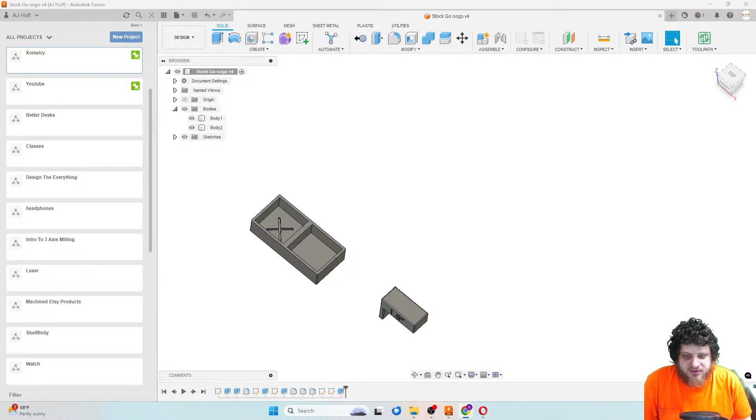So with the new end mill, it sounds good out there. I think that increased my cycle time by a minute or 2. I guess it was 15 minutes, so 16 minutes now. Anyway, so we're going to do some Fusion stuff today. We'll see how much we get through.

Plan A was to do my Fusion tool libraries to neatify them and modernize them a little bit. But I also have a modeling project that you guys might actually be interested in. And I want to start with the modeling project because I want to 3D print it as soon as I can, and we can do some prototyping right here on stream. And then we can switch back and forth between the tool libraries and the modeling stuff. So this model that's up right here, you guys might actually be interested in this.

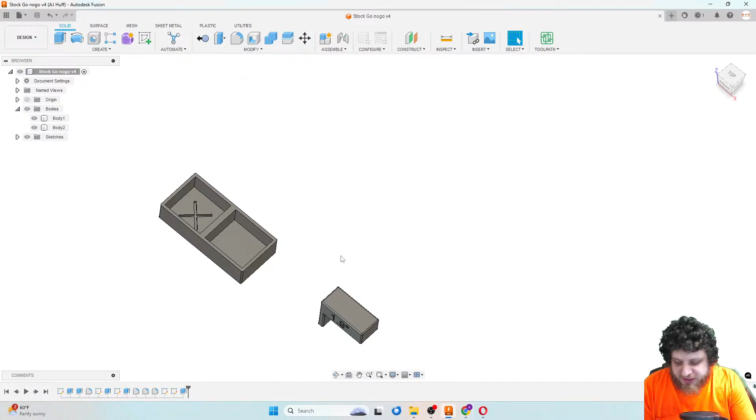This is what I'm using when I'm cutting material. So I made this little hooky thing here, and this is for setting the length of the material when I use my saw. So basically, I just hook the material right here on this end, and then I push this big flat end up against the blade of my saw, and then it's good to cut. And that gives me the length of stock that I'm using for this big job.

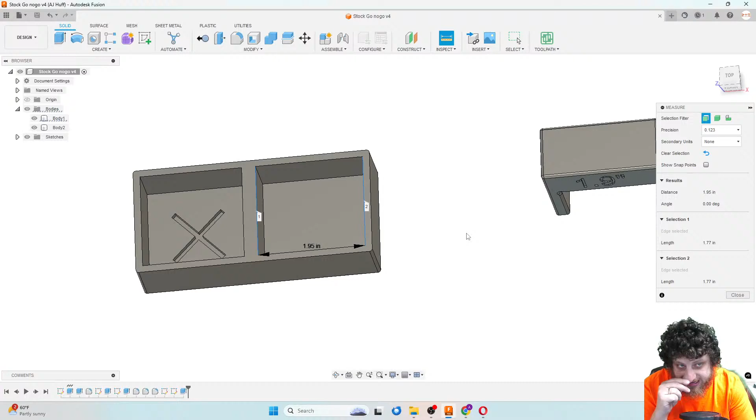And then once the stock falls off of the saw, I have this little bin here. And if we look at the length here, so this is 1.85. This is 1.95. And of course, our cut length is 1.9. So this gives us a go, no-go gauge for the material coming off the saw.

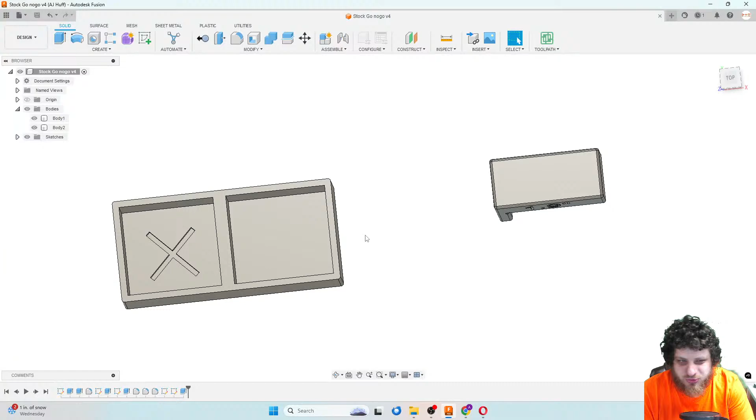So I can very quickly set it with this 1.9 inch measuring device. And then I can make sure that the actual cut went well by sticking it in here. Because if it's too big, I might break an end mill. If it's too small, I'll scrap a part and just be wasting machine time. So in that same vein, today we are going to design a go, no-go gauge pin holder. That's easy to say. Let me show you.

So on this big production job, there are a few parts that I need to check with gauge pins. And I don't really care what the actual dimension is. I just care that it's in spec. And so what I have done is I have taped a go gauge pin and a no-go gauge pin together. So like I think this one is 0.122 and this one is 0.124.

And if the hole is in that range, as long as the go goes and the no-go doesn't, then the part is in spec. This one is for, I believe, actually a slot, and it's the same deal. One side is the bottom of the range, one side is the top of the range, and I even have a really big one here.

So I check those. I check at least one part every single time with those gauge pins, and then there are a couple dimensions that I just caliper. And between those, I basically hit all of the tools. And if you check at least one dimension for all of the tools and the process is already proven, then you can be pretty confident that you're making good parts.

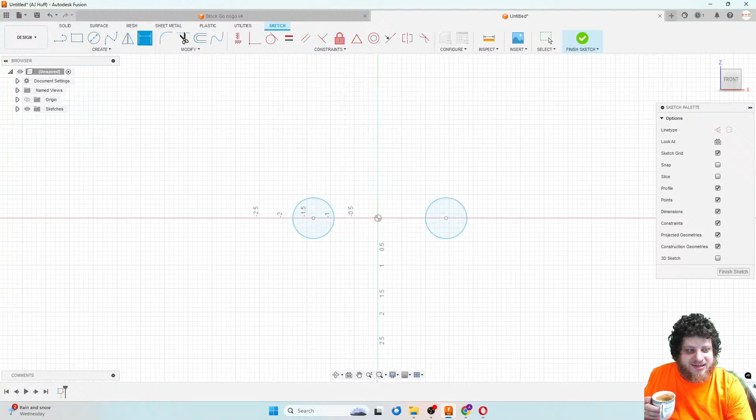So I'm going to call this go. So go hole equals, and I'll start with 0.125. And then I'm just going to come over here and type no go hole equals, I don't know, 0.13. These could be any dimensions. And we'll dimension this here. I think I'm just going to leave this as a fixed dimension. Maybe I'll make it parametric. How do we want to do this? We'll do it this way.

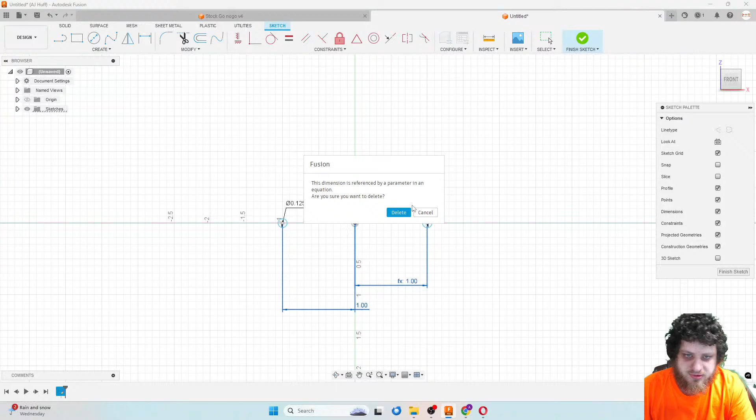I'll draw a line between the two circles and then put a point at the midpoint of the line and then coincident that to the origin. So now this will always stay centered no matter how long that line is. And I'm going to make a new dimension here. We'll call this center distance equals 2. Okay. So now those pins will always be 2 inches away, which should be way more than enough for basically any reasonable size gauge pin.

Maybe we could even go to 1. Because if you had 2 half-inch pins, then they would be half an inch away from each other. So I think that's fine.

Yes, James, I did see your PM. I did not read it, but I saw that it was there. I will take a look at that later. Like I said, I've kind of been running in circles all day. Hi, JB. Perfect time for it. It's 7:30 over there, and you're doing kind of the same. Sounds good. Wait, JB Customs, are you the same as JB Pipes and Muffler? I always assumed you were the same account, and I was confused as to why you had two memberships.

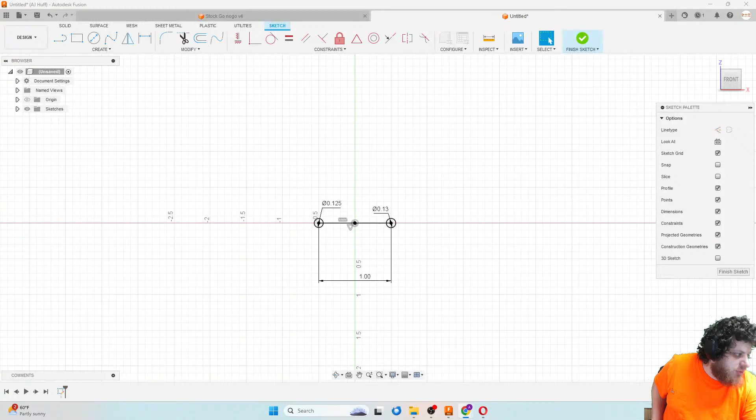I'm sorry, I still don't know how to say your name, but Oishishikana. We're doing this on OBS right now, but yes, I don't have it set up with the wireless cameras. Or well, I guess they even could be wired, but I don't have it set up out there by the machine.

What is my two-factor code? I rate that one a 1 out of 10. Okay, we're logging into Wyze. I think I can probably show you this again. Is there a way I can see my cameras? No, I don't want to buy a camera. I'm starting to think we can't do this, guys. I don't think this is going to work. Wyze view camera online. Wyze web view. That's not what I meant.

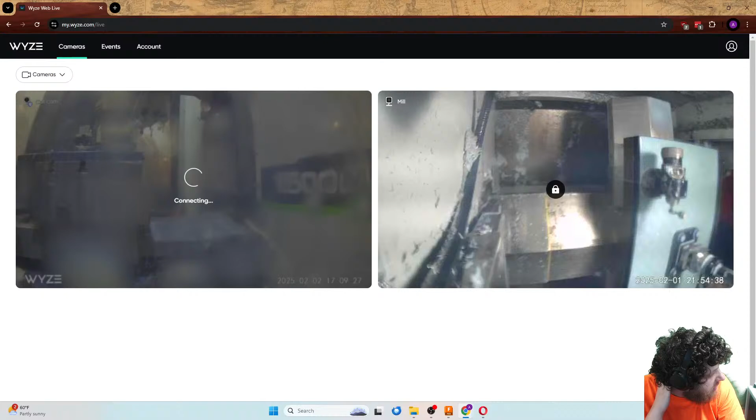Aha! This might actually work. Oh! I didn't know you could plug Wyze in. The camera's aiming the wrong way. Hey, look, you can see the Haas too. You can see the mountains of chips built up. All right, I'm gonna leave this here, and I will be right back.

Oisha can kind of, if you can tell me how to pronounce your name, that would be great. And also, if you can give me the words to Google, I'll get that figured out. Yeah, the cat cam is no longer being used for a cat. But one second, let me go change parts. I'll be back. I'll re-aim my camera.

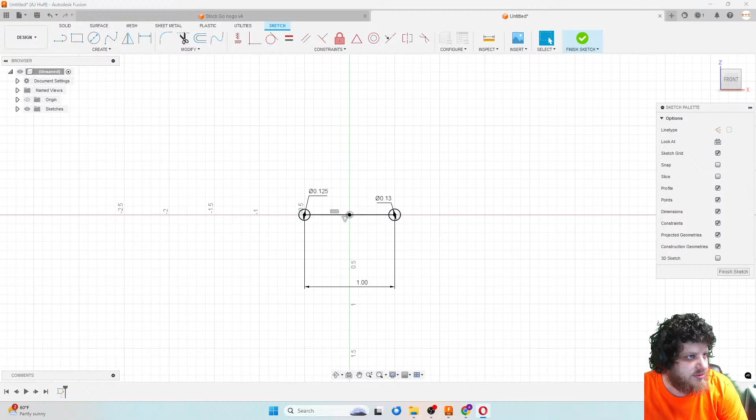We'll get this, guys. Oh no, I've closed all my windows. Where are you guys? There you are. A browser source for OBS. Cool. Why does LastPass not? Oh no. I know what's going on. This is fine. Where did Fusion go? Come back, Fusion. This wouldn't be a stream if there weren't some technical difficulties.

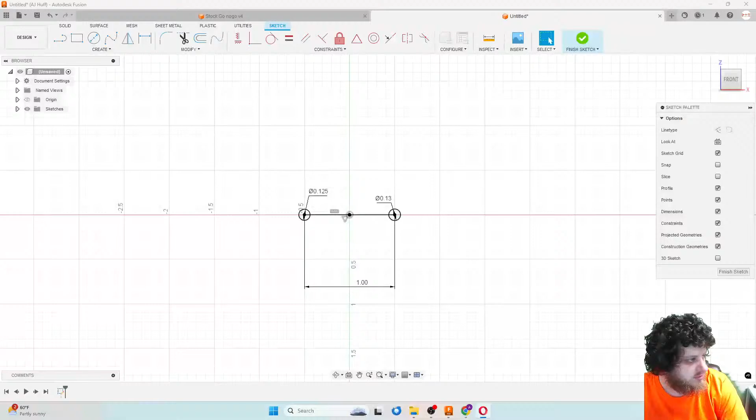Nope, we gotta do two-factor authentication again. Hold on. Add the URL as a browser source. Fine. Where's my OBS setup? You guys can infinity mirror. Sources. I've never done a browser source. Browser. I've lost that. Apparently, I closed the Wyze webcam. This got derailed really fast, which is probably not great considering I'm time crunched.

All right, create new, Wyze. Okay. Why did you not copy that? Control C, Control V. Okay. Oh my gosh, that did. Yeah, sure. How do I log in now? Oh, hold on, I lost chat. Let me pull the chat back up. How do we interact? All right. Now I bet we get to two-factor authentication again.

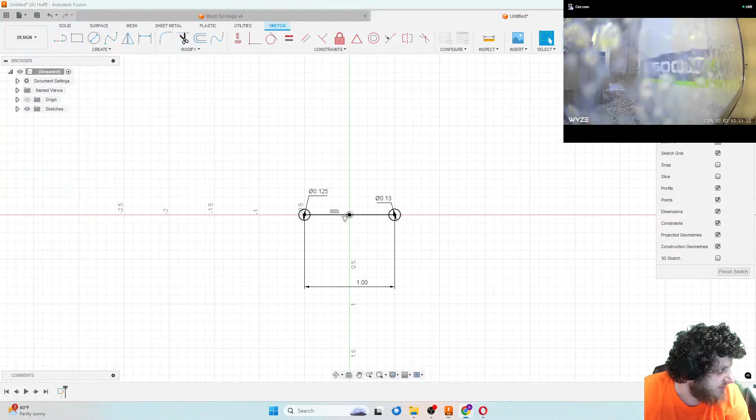Are you guys getting the audio from that? Is the audio coming through? Because you probably don't want the audio. It also sounds super tinny. I don't know how you're getting the audio, actually. You must just be hearing it through my mic, maybe? Oh, it's coming out of my own computer. Probably because I had it up. Okay. I think we're good now. I think that's as good as we're going to get.

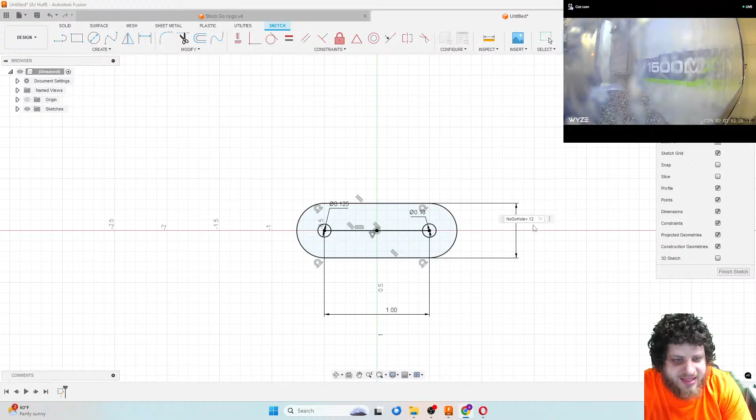So, all right, we're parametric modeling these. If I open up the parameters menu, we have our go hole, no go hole, and center distance. I think I'm just going to connect them with an obround. And will the no-go always be bigger than the go? I think it will be. So I can do no-go. Oh. This can be no-go hole plus... sorry. That can be no-go hole plus an eighth, maybe? Does that make sense?

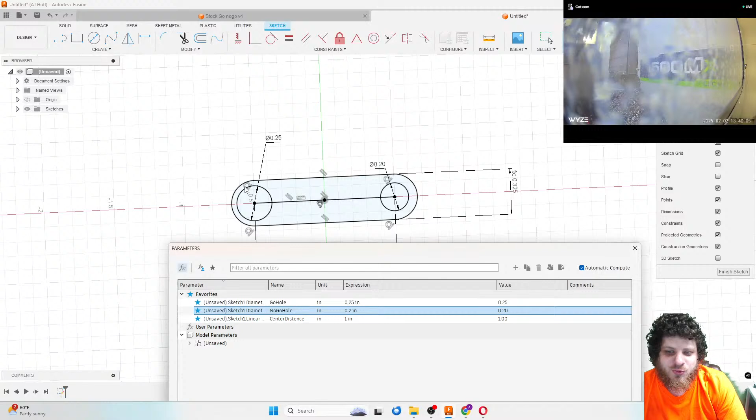That should be... Yeah, okay, let's try some combinations. So let's say you have a 0.45 go and a 0.46 no-go. Yeah, that still works. Now, okay, so this is kind of the parametric base of my little holder here. What if we tried 0.25 with the 0.46? Yeah, that seems to work. The only thing where we could have issues is if the no-go is smaller. It's working for now, but eventually this could end up smaller than the hole. So let's just set the no-go back to 255. There we go.

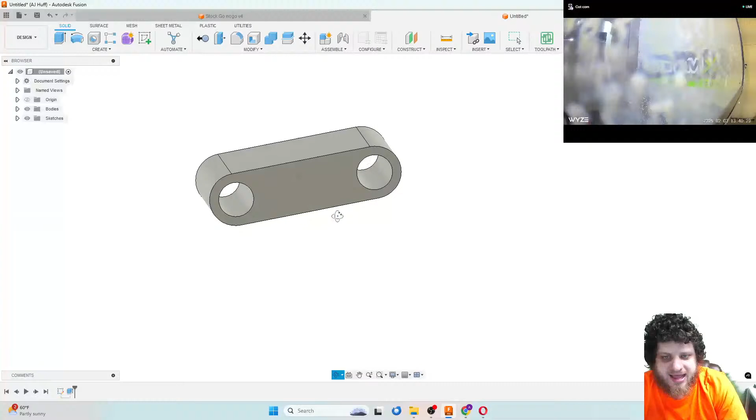And now we can extrude this out. This could just be thickness. I don't think that needs to be a specific number. Maybe 0.75 inches. Like, we don't need to make that tied to the pins. So this will be kind of the foundation, but I want a way to kind of secure the pins in there. And I've been thinking about how to do that. And I think the way is just to make it a tight fit and then kind of have some spring loadedness on this. 0.4 millimeters maybe. And we'll get those lined up.

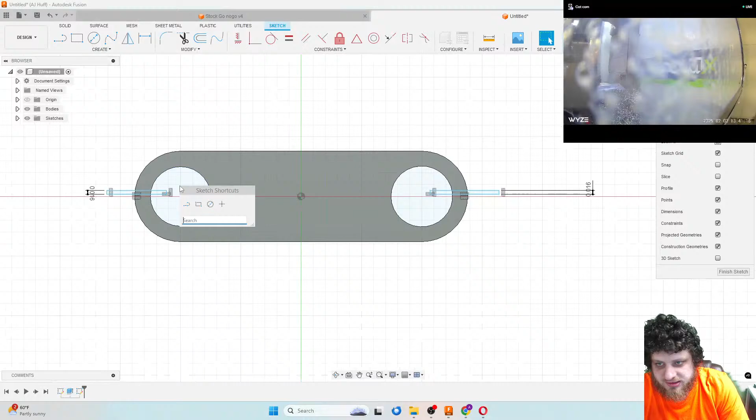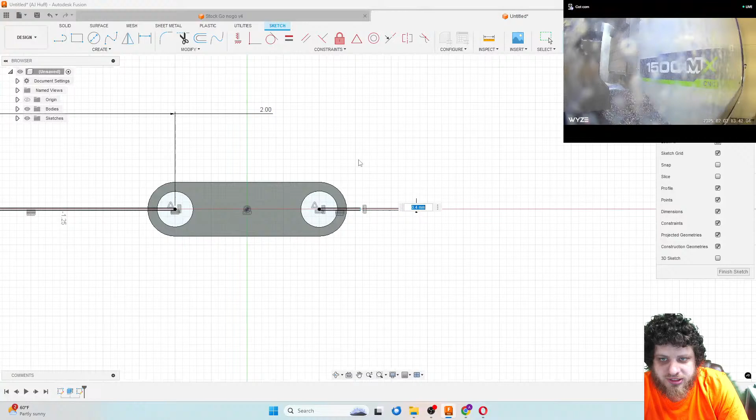And I'm going to put a center point on each of the sides here. And make those horizontal with the origin. That's funny. They line themselves up. Actually, I could have just done this. I'm just going to coincidence them to the center of that hole. Okay, there we go. And this doesn't really need to be anything specific. It just needs to be long. So I guess we could do it off the diameter. So no-go hole, I don't know, times 2. No, actually, that could cause issues. Let's just make it like 2 inches. The sketch will look ugly, but you'll never have a 2-inch pin in here.

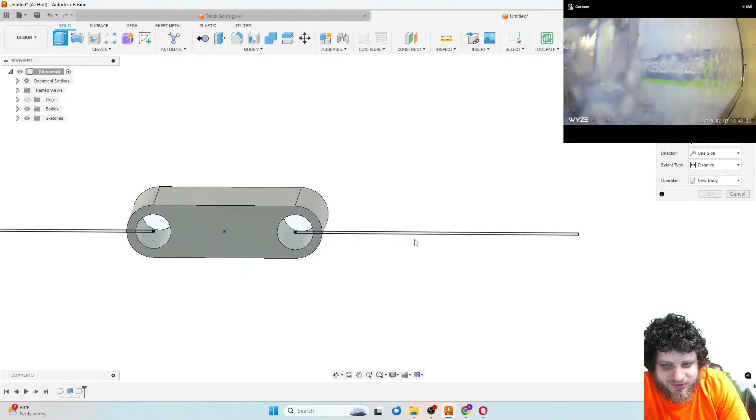And I guess I should have made this parametric. So let's call this slot width equals 0.4 millimeters. I'm doing 0.4 millimeters because that's the nozzle width on most 3D printers. I don't think it matters here because I'm in negative space, but that was my logic behind it. It's probably actually too small. And we'll extrude this as a cut, symmetric, through all. Okay. So that just cut everything no matter what. And then, to make sure that your pins don't fall out, I was going to have a place where you could wrap a zip tie around this. And now I need to figure out how to model that.

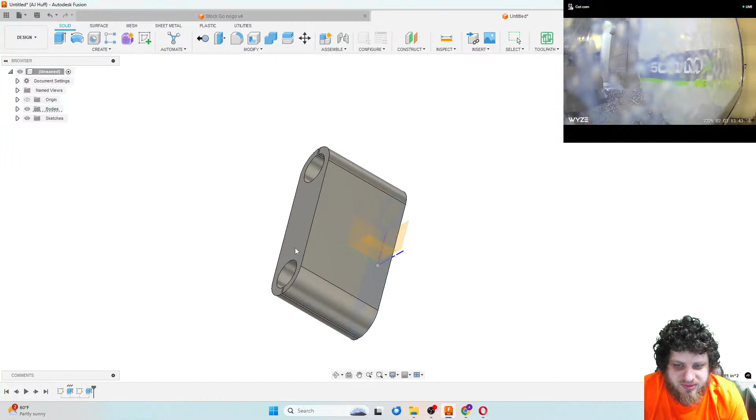We could put a plane in the middle. Oop. Come on. Put a plane in the middle. Put a sketch on that. Slice, project in our outside. And offset this maybe. How much? How thick is a zip tie? How big is a zip tie? Where's the zip tie? I don't have any zip ties on hand.

I don't know, 0.2. I guess it doesn't actually have to fit the whole zip tie. I don't like doing it this way. It doesn't actually need to fit the whole zip tie. It just needs to kind of keep it from sliding around. We'll do this as a... oop, that was the wrong kind of slot. We'll do this as a slot, center to center. And I'll just put a dimension here. Zip depth equals 0.2. No, not 0.2, 0.02.

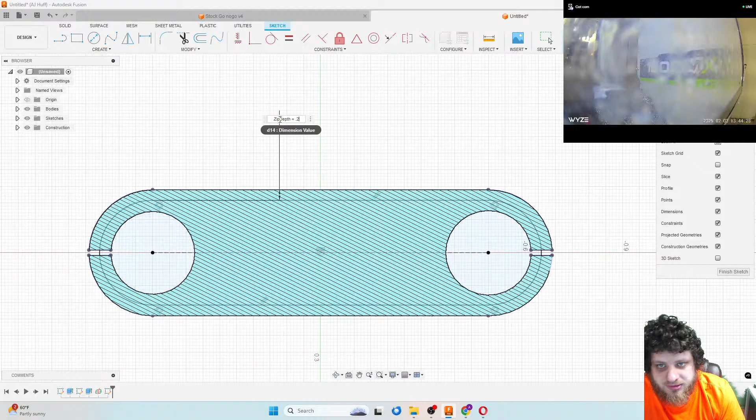Okay, so that should give us that, which I can now go ahead and do one more of those slots. And this time I'm just going to line it up with the outside. "Instead of wrapping the zip tie all the way around, drill 2 holes and put a zip tie on each side." It's not a bad idea. Let's do a test, Austin, on this one.

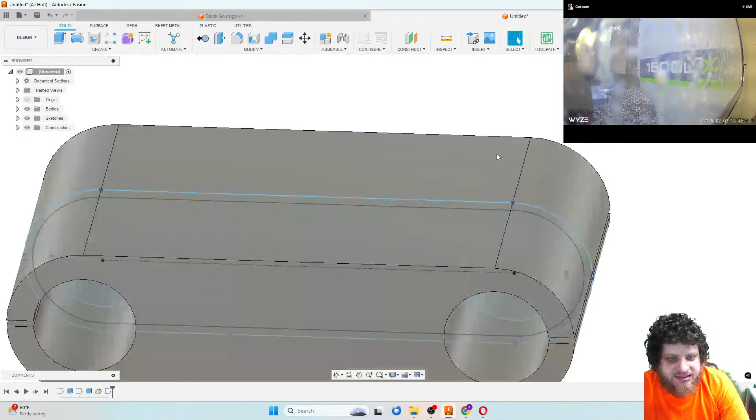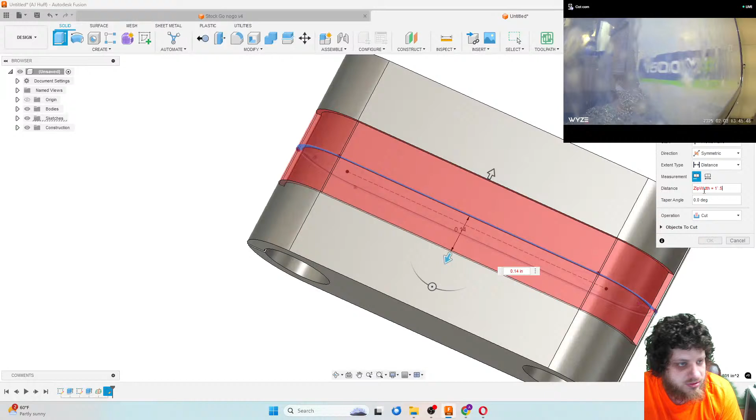The reason I'm hesitant to drill a hole is only because I don't want this to be determined. Like I want any zip tie to be able to work on it. And so I'm going to leave like a really, really big room here. But you are right, that would hold a lot better. Yeah, that should be more than enough. But yeah, you're not wrong. All right. Nope. I'm struggling with typing here. 0.15. Because if the zip tie is 1/8 of an inch, that should be fine.

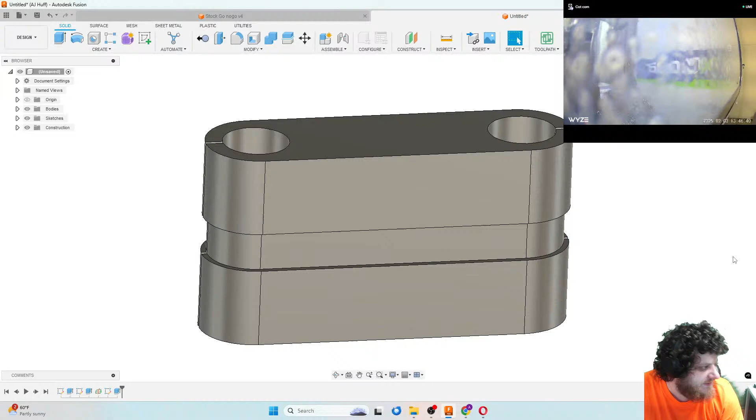"If I drill 2 holes, it'll compress. If I wrap it all the way around, it'll oblong the hole." Well, that's kind of the point. Because I want it to grab the gauge pins. So I don't really care if it's like compressing it as a circle or if it's just moving these sides in. That's fine with me. Jacob, yes, we're going to 3D print these. So the theory, if this works out, it will pull the outside. You're not wrong. I absolutely agree with you.

What if we do both? Because like I do, like, not that button. You're not wrong. I guess I'm just lazy is the answer. But how are we going to do this one? Let's try. We could do one big hole in the middle. Let's just try this first. This will 3D print in like 12 minutes.

But the idea here, guys, if this wasn't clear, and I'm sure I'll share this model. I'll just call this YouTube gauge pin holder. I'll share this model, but the idea is you can just open up the parameter menu, type in a size for a go pin and a no go pin, and then it'll just spit out whatever gauge pin holder you need. I am going to turn off some of these as favorites. They'll be there, but not as visible. All right, let's do a test print.

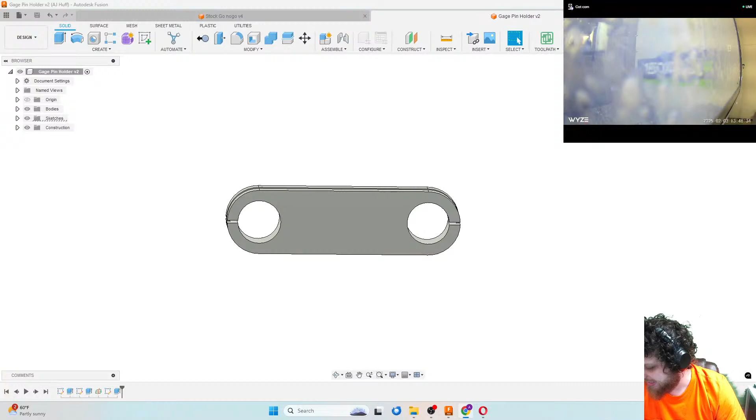Theo, we are making a parametric holder for gauge pins so that you can set up a go and a no-go pair instead of taping them together like I've done here. So we're trying to replace this janky setup with a real holder. The other thing was, do we want to emboss anything on here for go, no go? Yeah, I guess we do. Though that does mean I have to remember which side was go. So this side was go. Let's just make go really small. Now we can visually see a difference.

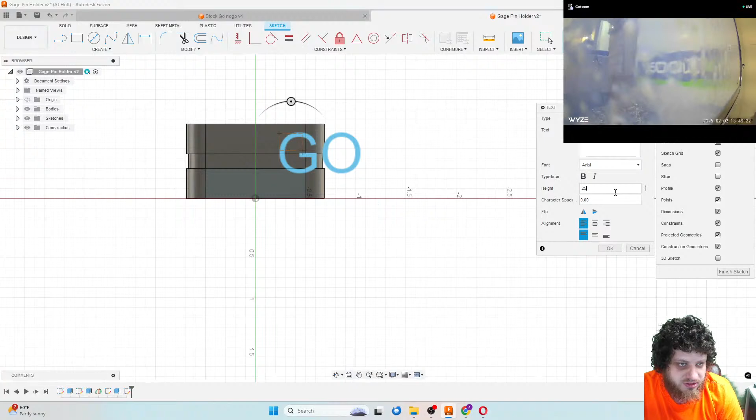So I think if I just do text is probably the easiest way. So go. We can make that smaller. How are we going to place this text, though? Maybe I just don't worry about that too much. Is it possible to do parametric text? I don't think they have added that yet. You have to use an extension. We can, at very least, constrain the text itself. I'm trying to remember if there were any tricks. Yeah, we center it, I believe, and you give it dimensions.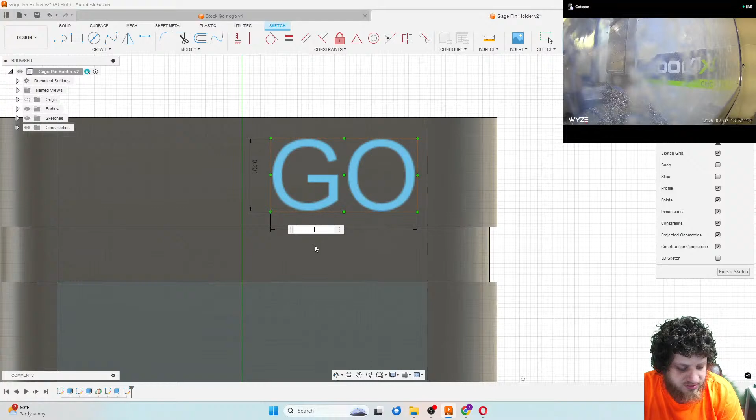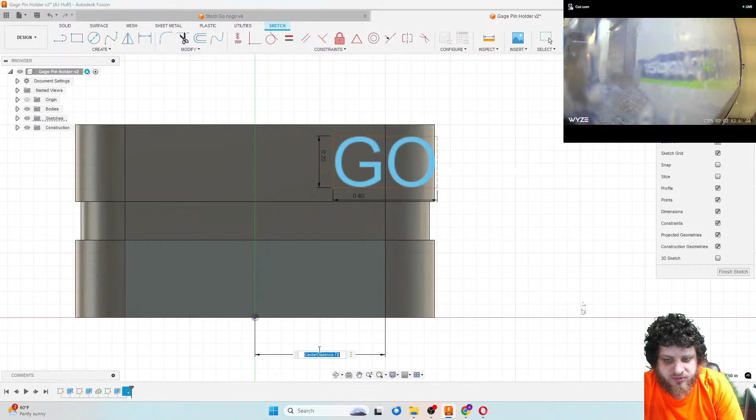And we can do a dimension from here to there. And what did we call the length? Width? Center. Spacing? I have no idea what I called that dimension. And of course I hid it down here now. Maybe I should not have hidden those dimensions or unfavorited them. Center distance. Okay, let's bring that back as a favorite. Slot width. I regret doing that. Okay, so center distance divided by 2. Almost. Divided by 4. Sure. And I think we want to turn it around.

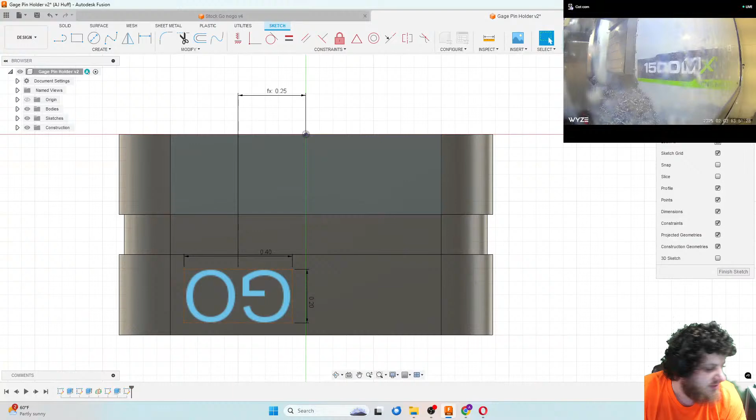JB, I'm going to set this up so that it can be done with 2-color printing. Oh, my machine's done. I can't actually do 2-color printing, but I do want to make this model so that it's useful to other people. Is doing these upside down of each other a bad idea? It seems like it should be fine. I'm just going to call this one no. Go and no. Or is that too close where they could get mixed up? First prototype. We can tune it later. All right, I'm going to go change parts. I'll try to re-aim the camera better this time.

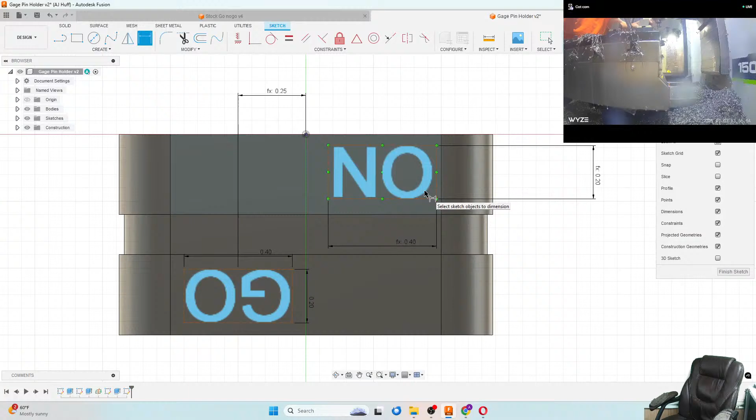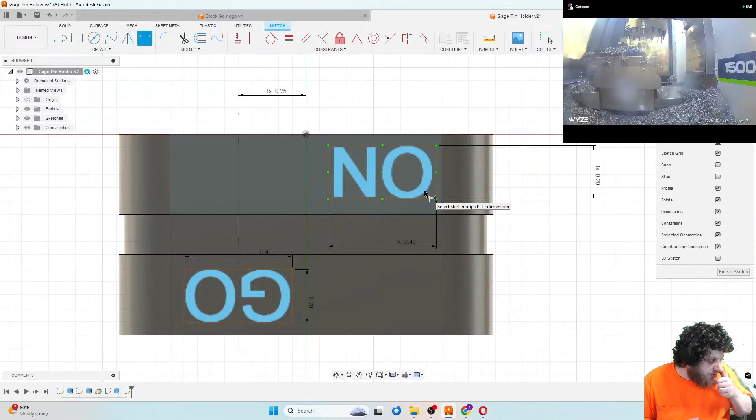Okay, we're back. Dual color printing gets weird sometimes on small text. Also, painting in Prusa Slicer also works, the modeling separates. Freaky Climber, you think I should do no-go? What if I just did a big X? But yeah, I don't have a lot of experience with dual color printing. I figured that my next printer might have that though. So that's where my logic of doing it as dual color came from.

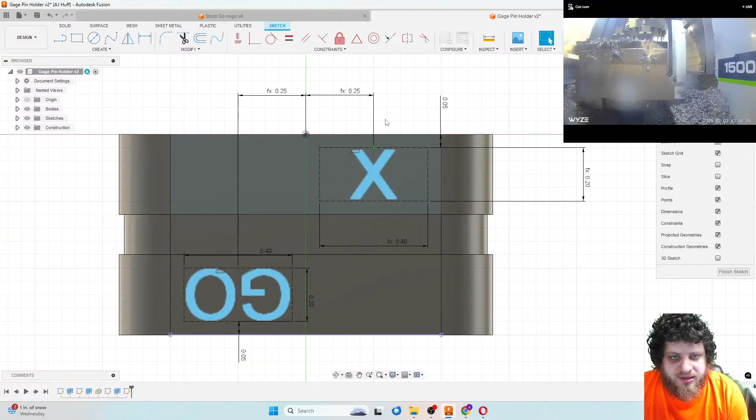Ooh. You should be horizontal. I guess we also need to set this offset here, which I'm just going to do a straight dimension. Your printer is slow, and it would be nice to have these printed on hand, but you don't know how you'd go about figuring out the flexure properties to make sure it covers normal ranges. I mean, you can do a Fusion FEA if you really want to, but I don't know. I'll do a couple tests, and if it works, then you can do it. If it doesn't, then not.

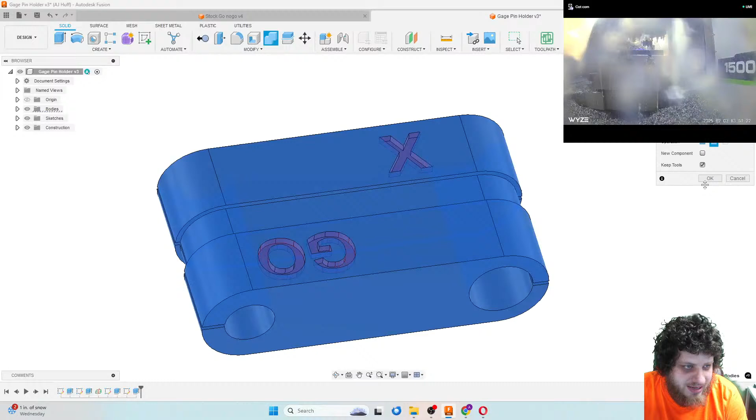I just have a Prusa Mini right now. Nothing particularly fancy. Where did my extrude go? Stop selecting that. I do plan on upgrading to a Bambu at some point here. I don't know how big to make this. I was waiting for the Prusa Core One to come out so that I could see if that was worth doing over the Bambu. But I just couldn't justify the cost difference. I like Prusa a lot better than I like Bambu, just the companies themselves, but it's really hard to justify. It was like a $500 price difference or something.

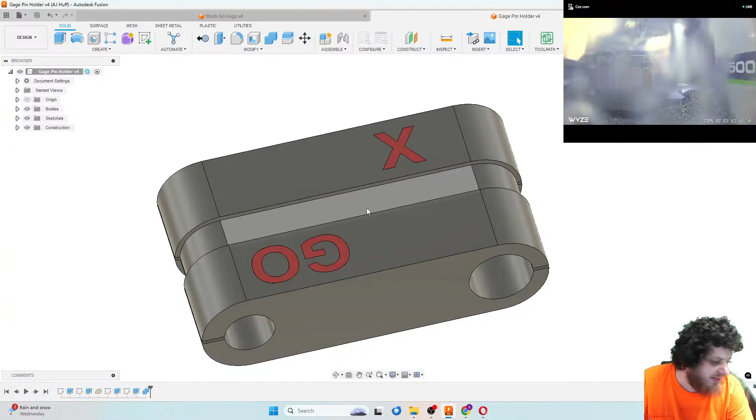You're on an Ender 3. I like my Prusa Mini. Why is it so dark? One of the reasons I really like Prusa is, they don't have to be supporting this printer as well as they're supporting it. But when input shaping became a thing, they just published an update and immediately my printer became like twice as fast. And they didn't need to do that, but they did. And I appreciate that. I believe Prusa will be around for a very long time, where Bambu, I don't know, they seem to make good printers and they'll hopefully be around.

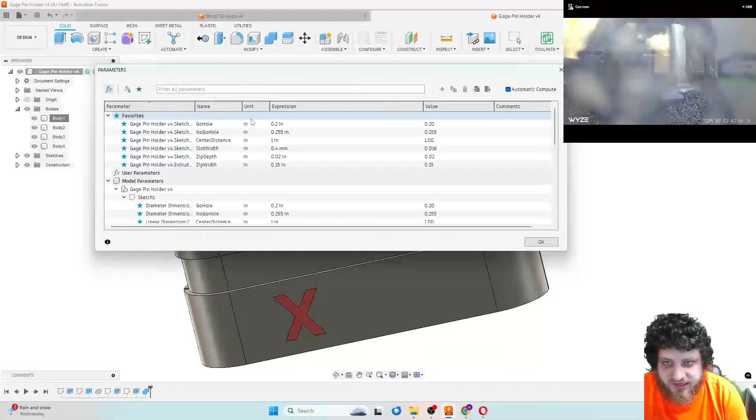All right, so this should be our thingy here. We have several bodies here, but we just need to export this one as a mesh. I should do this with actual gauge pin sizes so I can test it. I know I have one that's 0.122, and this is actually 0.125, because 0.124 would still be passing. Okay. And that seems to have parametrically updated itself for us. And we can always try tweaking these hole sizes. We may need to add a tolerance.

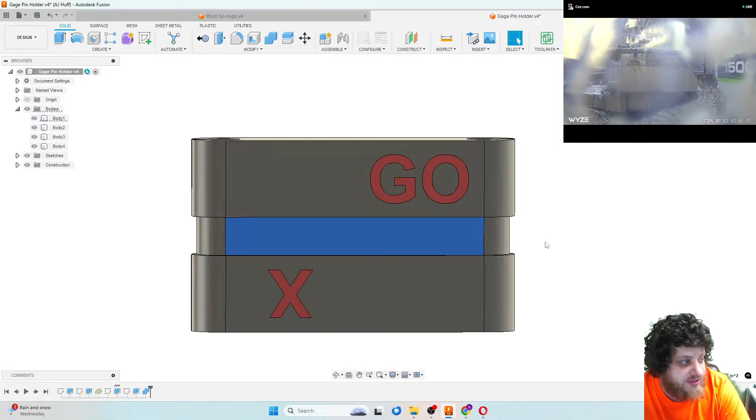I thought about that, Austin. You totally could. I wouldn't be able to easily print it on my single color printer. You could do that by just adding a layer line right here. Actually, no, I don't want to do it right now. I can make another version where I do split this in half, but you could just do it based on height in Prusa Slicer and just change filaments halfway through. That would be fine.

Here's the Core One. I really want a Core One, but don't send stuff, please.

All right, so I assume that I actually exported that. Did I not actually export it? Did I get distracted first? Save as mesh. 3MF. Gauge. Okay. All right, hold on. I just thought of an improvement. Come back, Fusion. To avoid overhangs, let's just do chamfers on this.

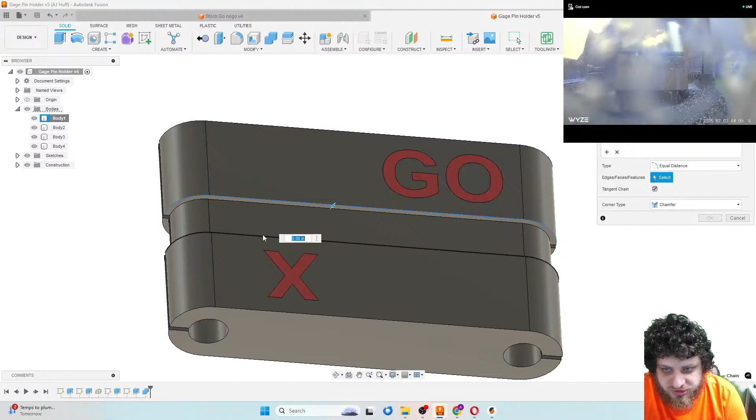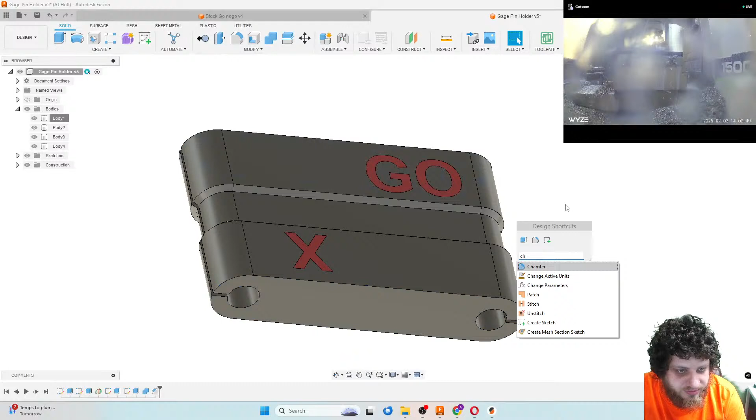Zip depth. Okay. That way there's no overhangs. And we might as well just go ahead and do some fillets. Actually, this is probably a good place for chamfers. On things that people touch, I like to do chamfers.

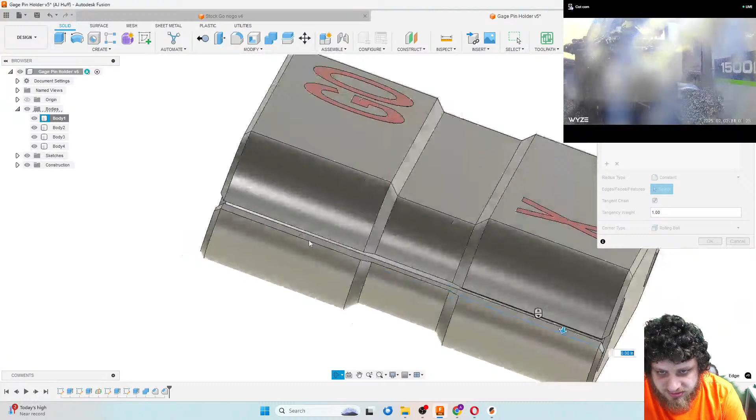So do that. And do we want to fillet these maybe? Use magnets. I don't want to use magnets around the ferrous parts. It would also magnetize your gauge pins, which might be annoying. But dude, I'll share the source files with you. Actually, I already did if you scroll up and find that link. I think whenever I hit save, a new version will be available. So feel free.

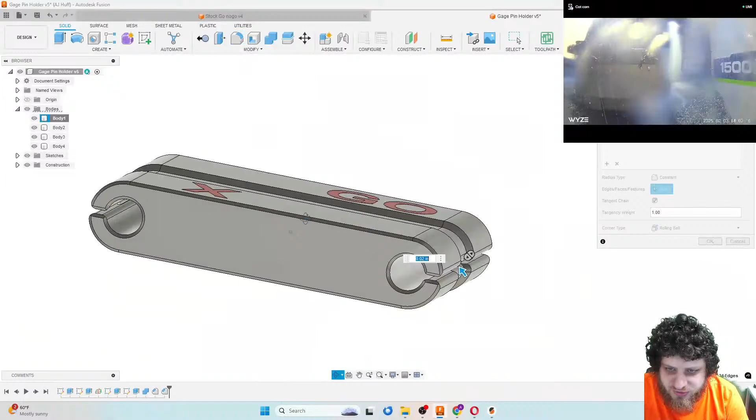So just put in these fillets here. This will kind of help the printer go around the corners more smoothly. I think it'll just give you a generally better print. All right. So now let's for realsies export this. Gauge. And do a quick little slice. We can orient that. I mean, that should work. I don't see anything weird about that.

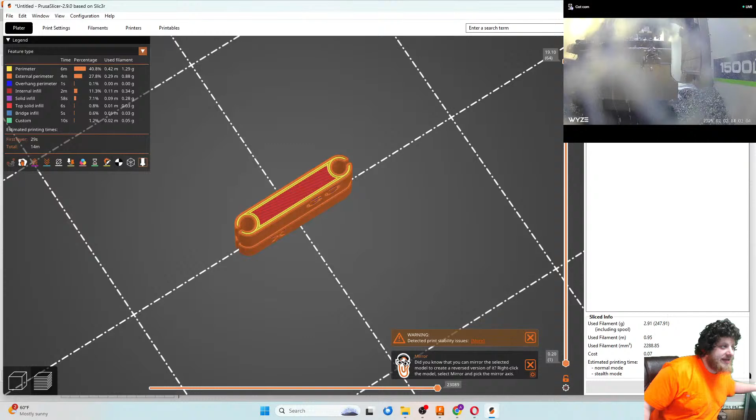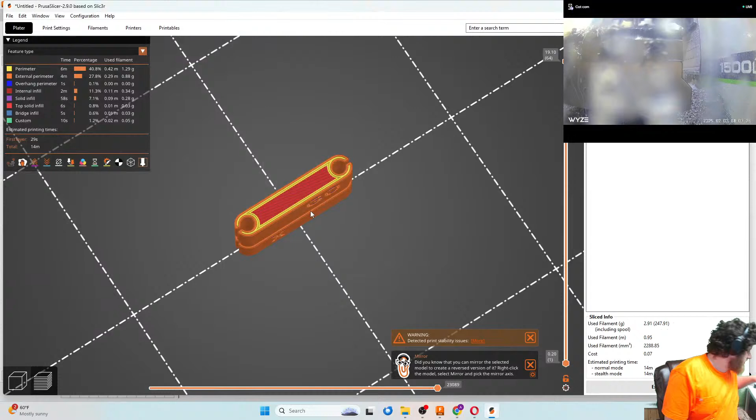What are we at print time wise? 20 minutes. What if I go to my 0.3? 14 minutes. Perfect. Let me get this print started. My printer's right here on my desk next to me. I always keep these little alcohol wipes on hand to clean the print bed of my printer. You'd be shocked at how much of a reliability difference it makes. Now I need to export this. And plug her in and hit print. All right, in 14 minutes supposedly, we'll have our first prototype that we can test out. The text will probably be a little bit funky, but it should still be readable. And I'll go find a zip tie.

Okay, yeah, I've seen Close videos or however you pronounce his name. I know who you're talking about.

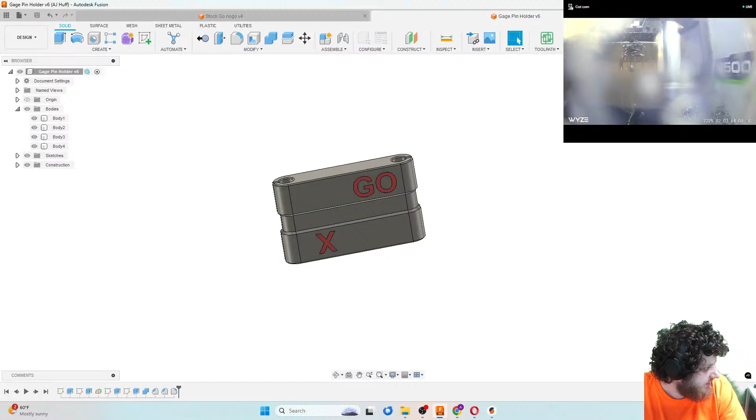You would rotate the slot 90 degrees to get more force out of the zip ties. I see what you're saying. That would kind of solve our problem. Yeah, so Austin and I were talking about doing a circle through there, but you're right. That would solve our problem. It would also give this arm of the flexure a little bit more room. Let's see if we can change that quick. Yeah, you're right, Frogtown. So how did I constrain these? Let's see if we just get rid of the horizontal and vertical constraints.

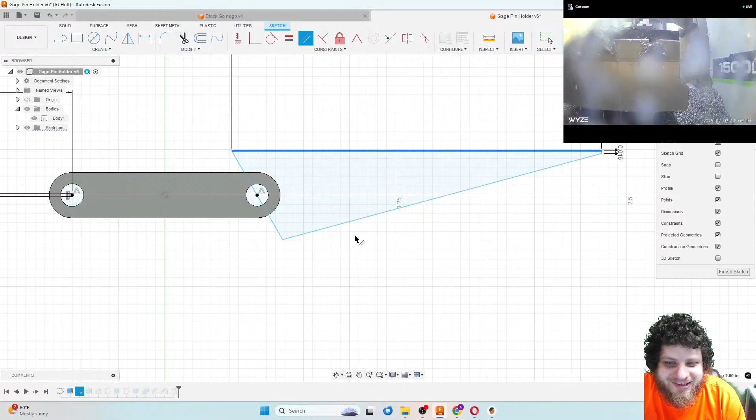So Frogtown. Is Frogtown like a nickname for a city? Like the Windy City is Chicago? Or is that just something else? A nickname for your shop or something? I'm curious about that name.

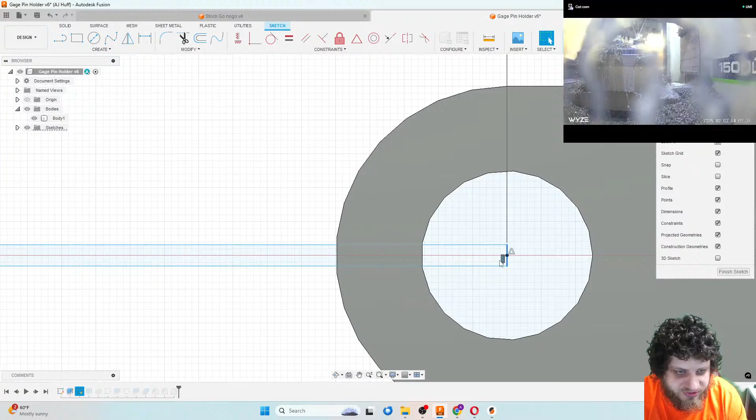But you're right. I think that's a better solution. Don't mind me as I just reconstrain this entire thing. There we go. And we got to do the same on this one. It's going to break all of our fillets and chamfers. I could have sworn this already inherently had these perpendicular constraints. Aha, okay. Now we can make you vertical. Please. Make you vertical. Hey, look at that. It even mostly survived except, looks like we lost a couple chamfers. You're fine. And our couple fillets.

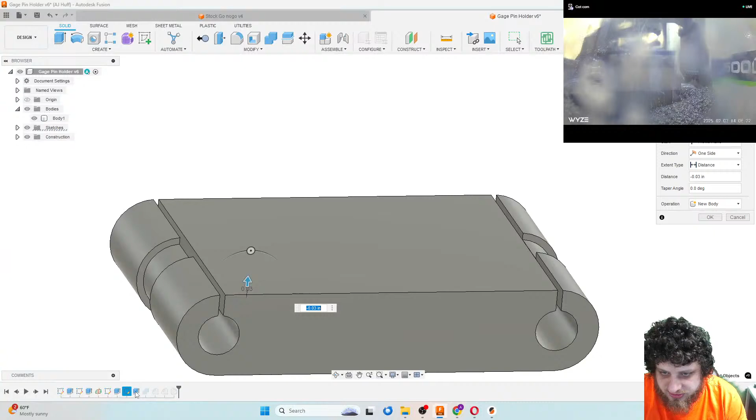Oh, my slot disappeared. Let's get our slot back. Was that this extrude? No. Was that this extrude? That definitely got funky. Where'd that sketch go? Nope, not that sketch.

It's a Northwest Ohio nickname. Okay, I did not know that. Like the northwest of Ohio is called Frogtown. Like that's the name. I don't know. Or is it like one city specifically in Northwest Ohio?

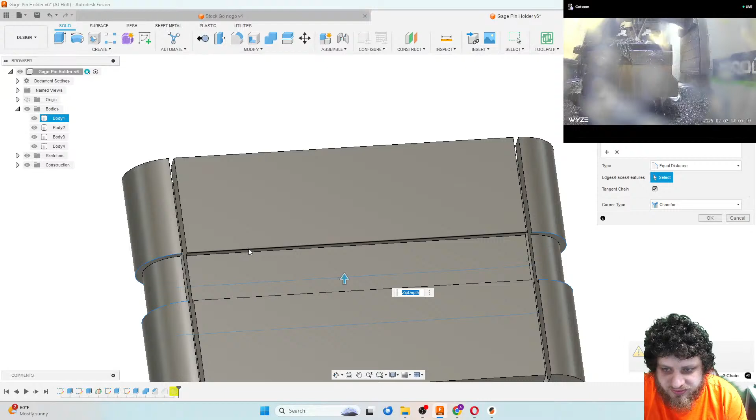There we go. That's why our chamfer was mad earlier. Let's get that back. Okay. And now, who's mad fillet wise? I guess we can do that. Sure. Okay. Well, the first version isn't printed, and we already have a better version. I wish there was some way that we could hide the head of the zip tie, but I'm not really sure how to do that. But I like this. I think this is a good idea. I think that'll work. So I think we kind of combined what Austin and Frogtown were saying. If you move the zip tie clamp to just be two holes wrapping around, you could, yeah. Interesting.

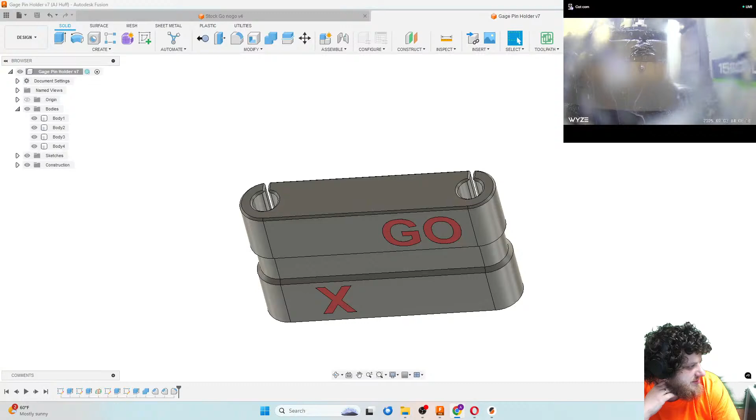So, eliminate overhang and remove. Oh, so you're saying that if we did some holes here, we would get rid of this overhang. But...

Oishis Kana, you still haven't told me how to pronounce your name, and I'm still butchering it.

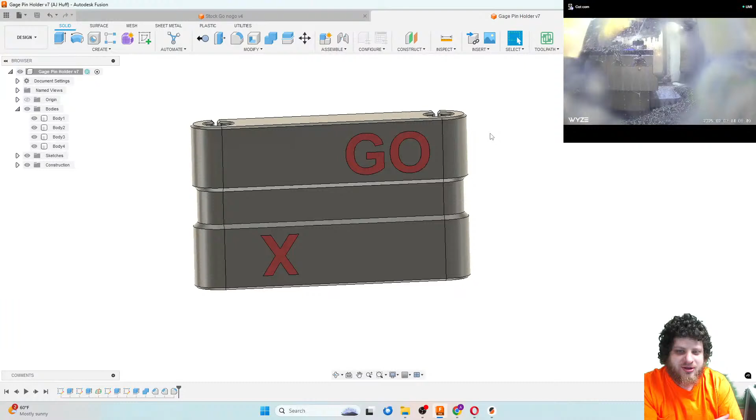All right. Well, I believe we have tackled the first goal for today. Let's do a quick test here. Let's see what happens if we go to 0.5 and 0.51. Are we going to break anything? No, it appears not. Okay.

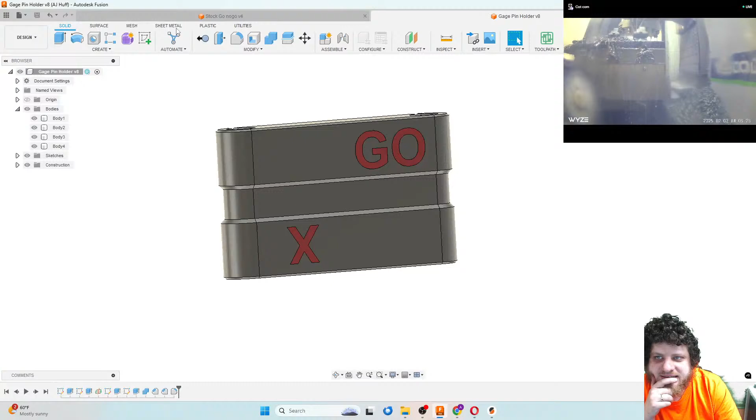So I'm liking this. And again, I'll upload a version that has these with it, and I'll have a version that has it separate so that people with multicolor printers can multicolor print it. All right. Now we need to figure out my tool library. Let's go look at the current state. I guess we can do it right here in this model.

So basically my problems came about when I added the new machine. And I never quite had everything sorted out on the Haas. But because there's only one machine, they weren't really a big issue to work with. So I have right now an archive, and inside here is just kind of a bunch of random tools. I do actually use the specialty tools and the common tools. These are basically if I ever need a weird tool that I'm not going to ever stock or whatever, I stick those into there.

And then I have, I called them swing tools here. That is actually wrong. These should have been listed as core tools. So I have my core tools here. And yeah, I somehow managed to name this library correctly, but none of the other ones.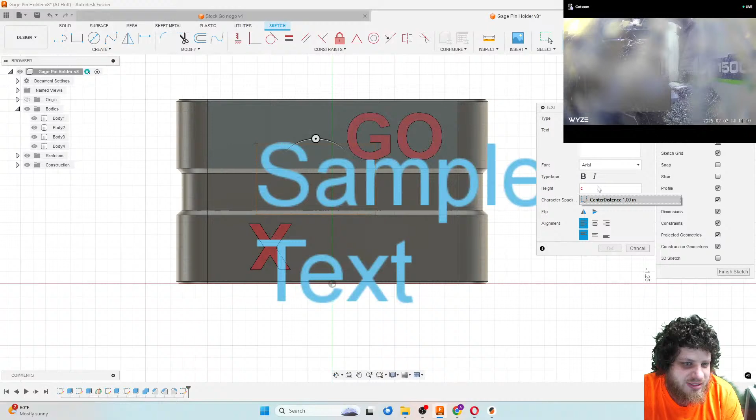Use text for size. I would do that if it was parametric. I don't think text can get pulled from a parameter. You can do it with an API plugin, but at least at one point you couldn't. Maybe they've added that. But there is, I believe, a parametric text plugin. Yeah, because how would you even do it? Because I can't even type in the parameter name. Yeah, I don't think you can. I think you can do it in the height, but I don't think you can do parametric text without that plugin.

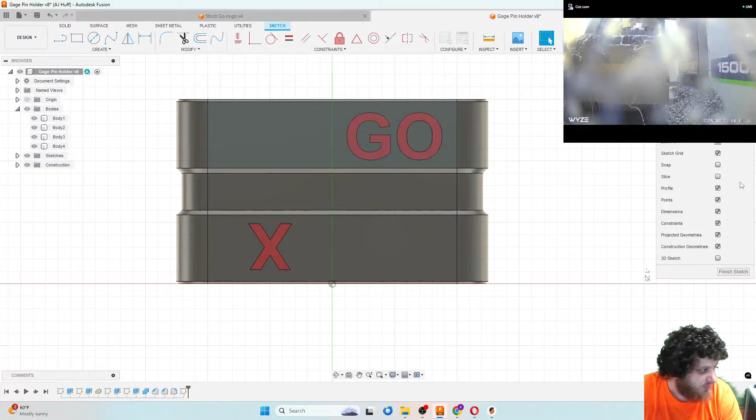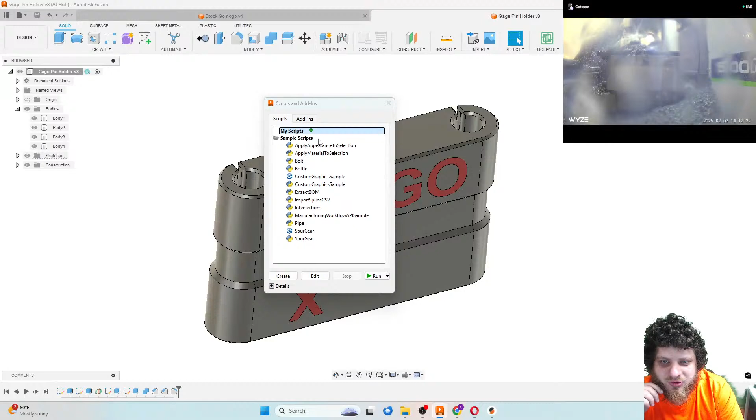Wow, I can add all kinds of add-ins. So there is a plugin to do it, but I don't know. We can try it if you think. Yeah, it's just gonna... I think you have to use the plugin. I've done it before, and it's not bad. But you just have to... Do I even have it installed here? No. I don't remember exactly how it works, but you have to download it and install it, and then it does the thing.

But yes, enough people have run into this problem that people have found a solution. You can make the box the dimension of the parameter, and then measure the box. Yeah. Is it possible to project a dimension to a surface? If you're trying to get the text of the dimension onto a surface, no, because they're not considered geometry at all.

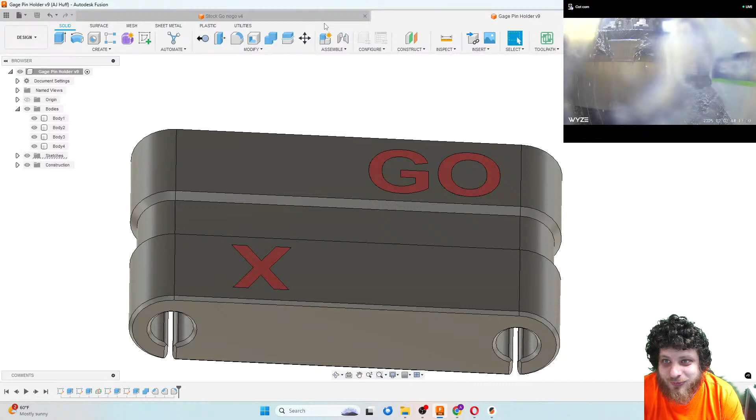You could probably do it with some really wild logic, like with if-thens and greater-thans, because you can do that in parameters. So we know the dimension already of the pins. So you could do, if first digit is 1, then show this body. If digit is 2, show this body. It would be a nightmare and a mess. That's definitely not worth it.

That's because I never really got to the point where I was assigning dedicated tool numbers. And on the Haas, the highest tool number you could put was tool 20, so designating something tool 99 would throw an error. So these are basically filler tool numbers that would intentionally cause an error if I accidentally forgot to change them.

The problem is, one, that's annoying and makes it hard to identify tools. Number two, on the Tormach, that's the number of the probe. So if you program a toolpath with tool number 99, it tries to bore with your probe, which is not what we want. So we're going to come up with a whole tool number system here and then start implementing it. But first I need to go change parts. So BRB.

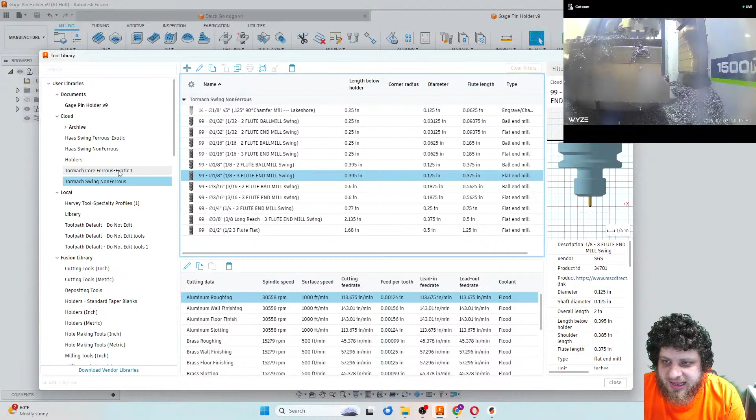I don't like how I have it set up now. I do have all of the presets done for the most part. Some of them have not been updated for the new machine, so I'll have to do that, but having all of these is very handy here. And you can see some of these I did manually. Some of these I used pre-tool for, but we can go ahead and expand that a little bit here. So let's come up with a game plan.

Wow, what is that? Oh, that was the log from the Tormach. Let me just close everything that I have open here. No, okay. I've closed too many things. All right, so we need to figure out what are the things we need to capture in tool numbers.

Theo, yeah, I like my office mill. It needs a new spindle. The machine I have is awfully beat up, but it works fine. Other than the spindle slightly dying on me, I would be happy with another office mill or compact mill. You kind of have to understand the limitations. It is not a machine you buy for hogging out material, but it works. It's great for small precision stuff.

So, all right, we need... Oh, you guys are going to learn how bad I am at spelling. I actually don't want to do this in Notepad. I changed my mind. Let's do this in not Word. All right, so we need to capture the material, the tool style. Do we care about tool style, like flat versus ball? Maybe just tool type in general. I think material. And also, do we care about rougher and finisher? I'm coming up with the system on the fly here, so we'll start implementing it hopefully.

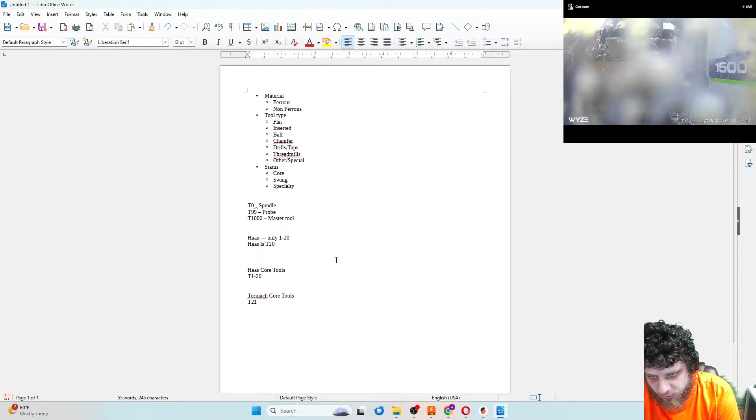So the core tools on the Haas have to be 1 through 20. So Haas core tools T1 through 20. The Tormach core tools can then be T21 through, well, however many I have. It has less spots. Oh, and actually I don't need 20 core tools in the Haas because I need spots for swing tools. So how about 1 through 16 on the Haas? Actually, I think I had 14 core tools. 15. 1 through 15 can be core tools on the Haas.

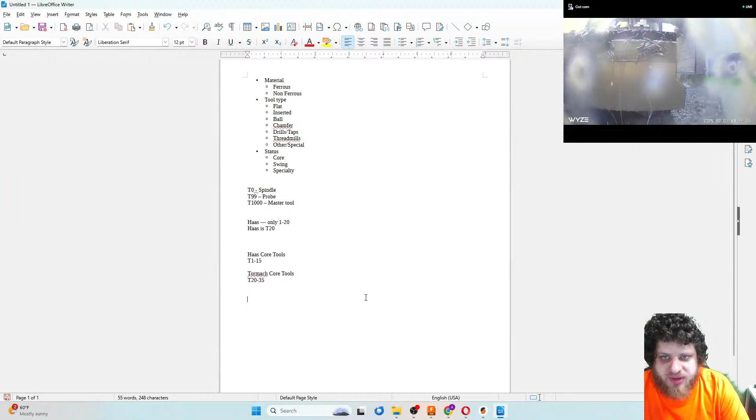So then on the Tormach, we'll do 20 through 35. Okay. And those we don't care about getting any more specific with what they're for, because those live in the machine all the time. Okay. I'll eventually just have those numbers memorized. So then maybe we start at tool 100 for, sorry, so these are swing tools.

Jacob, yeah, I'll keep this somewhere. I have a Google Doc and stuff that I use. I used to have a wiki, not that I use for business stuff, that I use for personal stuff, and that would be handy to bring back.

So what if, my phone's ringing? 1 second here. Hello? Okay, thank you. I'll be in a bit. Bye. Lunch is ready.

Okay, so that leaves this like 35 through 100 space, because how many swing tools am I going to have? We could say like tool 40 through probably 99, which I guess would be the probe, 98. We could say those are swing tools. And again, just not give those a specific number.

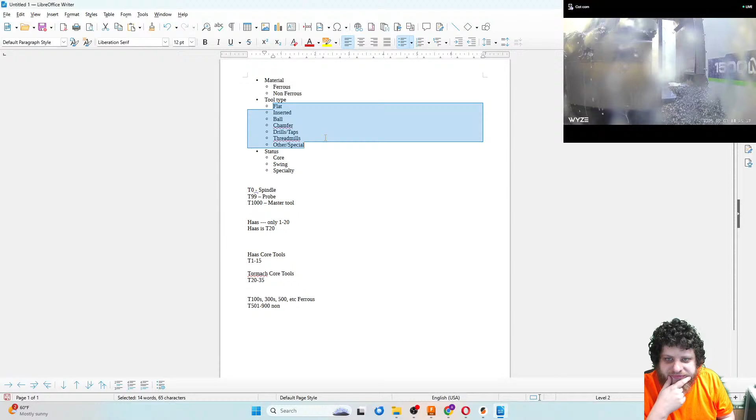Or we could start doing blocks for flat, inserted, ball, chamfer. I don't know. I think that's getting too specific, though. I don't actually know if I want to go that granular on these numbers. I think as long as I have separate libraries for core versus swing versus specialty, I think that's enough. Maybe we could separate out the common ones versus the less common ones. Like we could give a flat a chunk.

I feel like I'm boring you guys because there's been zero chatting. Or you guys aren't following this at all.

We don't want to overcomplicate things. That's for sure. I think going odds and evens overcomplicates it. So if we do 100 to 500 ferrous, actually we probably want this 499. 499 ferrous, T500 through 899 can be non-ferrous. And again, really, I just mean hard materials and soft materials. Is that the same number? That's 399. That is 399. Okay. And that saves the 900s for random tools.